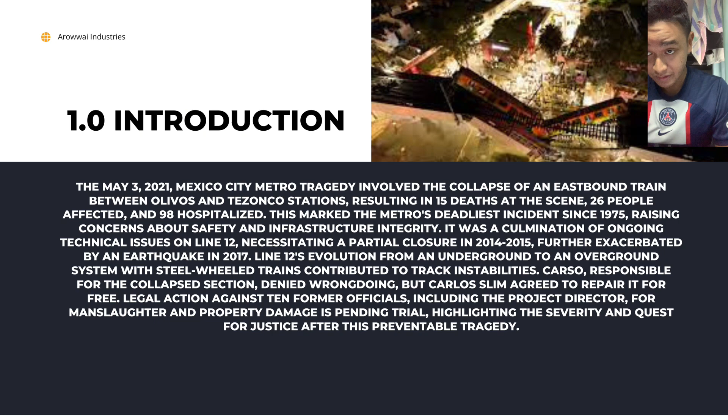Next part is 1.2 Cause of the accident. Empresas ICA, along with Alstom Mexicana and Grupo Carso, undertook the Mexico City Metro project, yet critical flaws emerged despite their collaboration. Mayor Claudia Sheinbaum enlisted Det Norske Veritas, DNV, a Norwegian risk management firm, to investigate the collapse.

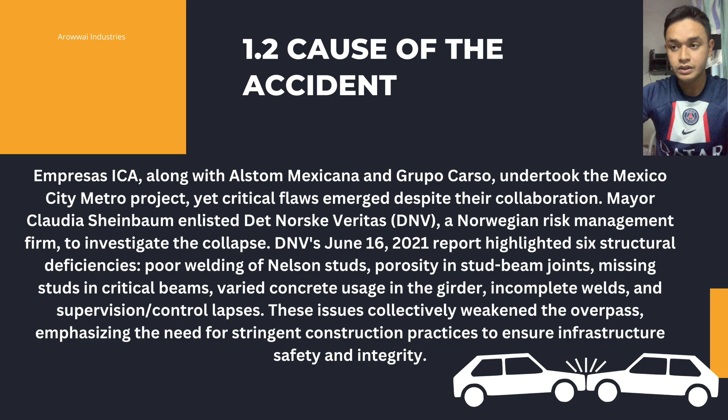DNV's June 16, 2021 report highlighted six structural deficiencies: poor welding of Nelson studs, porosity in stud beam joints, missing studs in critical beams, varied concrete used in the girder, incomplete welds, and supervision control lapses. These issues collectively weakened the overpass, emphasizing the need for stringent construction practices to ensure infrastructure safety and integrity.

Next part is 1.3 Ethical issue. The collapse of the Mexico City Metro overpass has raised ethical concerns that demand attention. This encompasses the responsibility of infrastructure projects, especially public transportation, to prioritize safety inherent to construction standards and the credibility of involved entities. The DNV report underscores ethical aspects tied to quality assurance and oversight through construction. Corporate responsibility, notably for companies like Carso, requires transparent communication and accountability for errors.

The steps to rectify mistakes and government oversight also hold significance, necessitating an effective framework and ethical conduct to prevent such accidents. Transparent post-accident communication, fair legal process, and addressing these ethical considerations are vital for fostering a transportation system grounded in safety, transparency, and social responsibility.

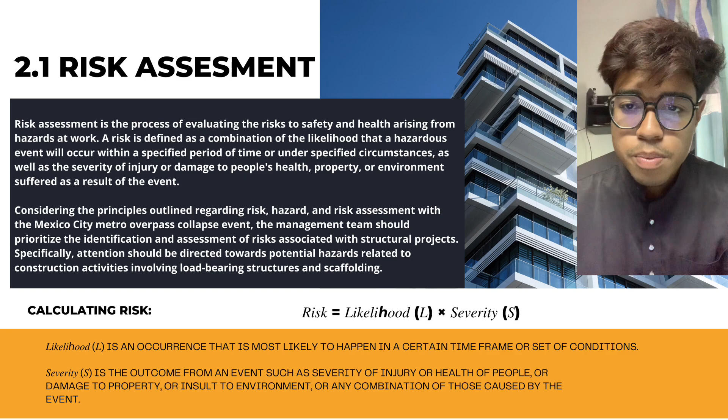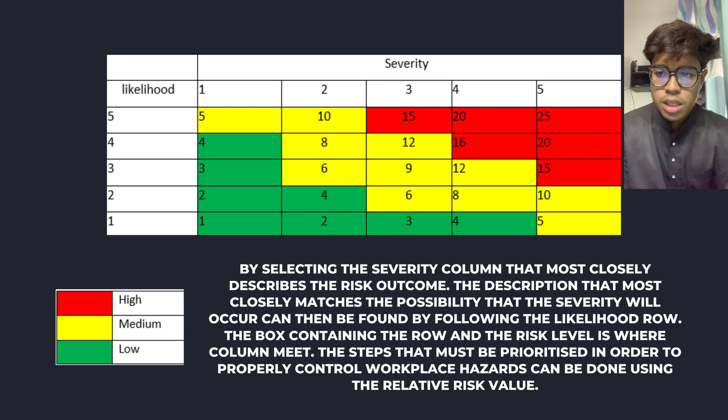So this is the level of hazard based on the table above. Hazards marked as high risk need urgent attention to protect life, safety, and the environment. Clearly identify and assign responsibility to individuals for taking immediate action and follow-up. Consider using a detailed risk assessment method like quantitative risk assessment to figure out effective ways to control and minimize this risk. As you guys can see, we have indexes 1 to 4, 5 to 12, and 15 to 25: 1 to 4 is low, 5 to 12 is medium, and 15 to 25 is high.

For the high, you can read in this column: a high risk requires immediate action to control the hazard as detailed in the hierarchy of control. Action taken must be documented on the risk assessment form, including the date for completion. For the medium, a medium risk requires a planned approach to controlling the hazard and applies temporary measures if required. Action taken must be documented on the risk assessment form, including the date for completion. And for the low, a risk identified as low may be considered acceptable and further reduction may not be necessary. However, if the risk can be resolved quickly and efficiently, control measures should be implemented and recorded.

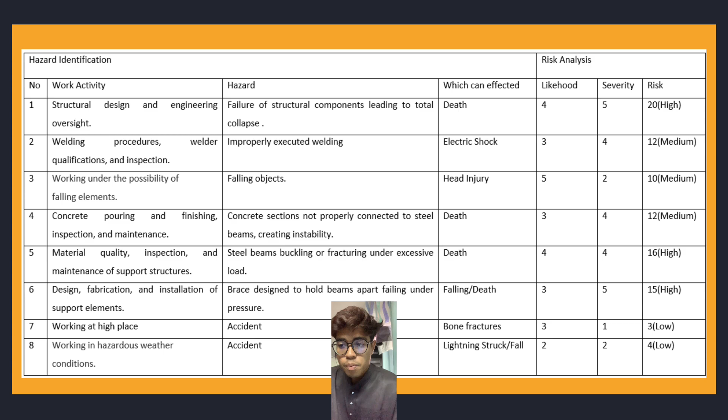For the second one, we have welding procedure, welder qualification and inspection. The hazard is improperly executed welding, which can cause electric shock. The risk of this hazard is medium, which is 12. And number 8 is working in hazardous weather conditions. The hazard is accident, which can cause lightning strike or fall. But the risk is low because it's in the range of low hazard.

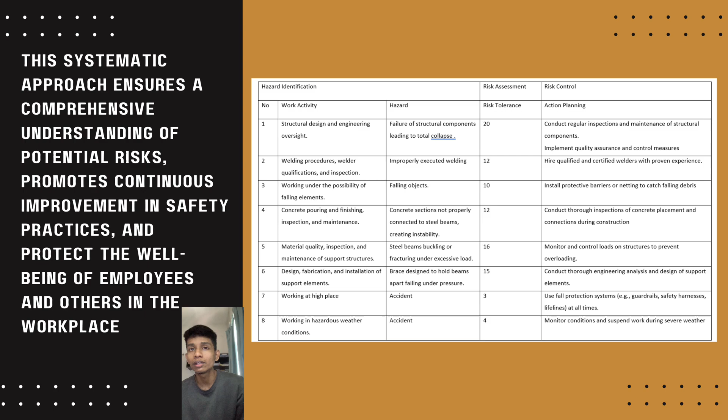As we can see, here is the table of hazard identification. There are 8 hazards, and we have the risk tolerance and action planning.

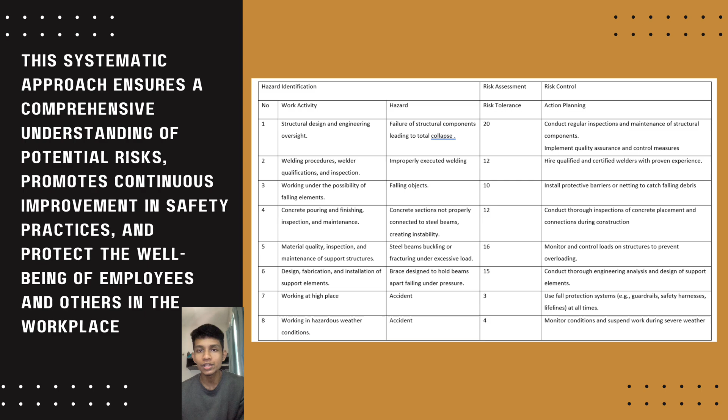Now I will explain about this table. The high risk activities, as we can see, have a tolerance of 20, the first one being cause of failure of structural components leading to total collapse. In order to control the risk, implement rigorous quality assurance and control measures during construction. Conduct regular inspections and maintenance of structural components, and develop contingency plans for evacuation and emergency response in case of structural failure.

Then we can see medium risk activities, which have a risk tolerance of 12, for welding procedures, welder qualifications, and inspection. To address this, consider hiring qualified and certified welders with proven experience and conduct regular inspection of welds during and after construction.

And the last one is low risk activities, such as working at height, with the lowest risk tolerance of 3, for accident hazards, indicating effective control measures. Continued vigilance is necessary. Enhance awareness and mitigate potential risk by using fall protection systems, for example, guardrails, safety harnesses, and lifelines.

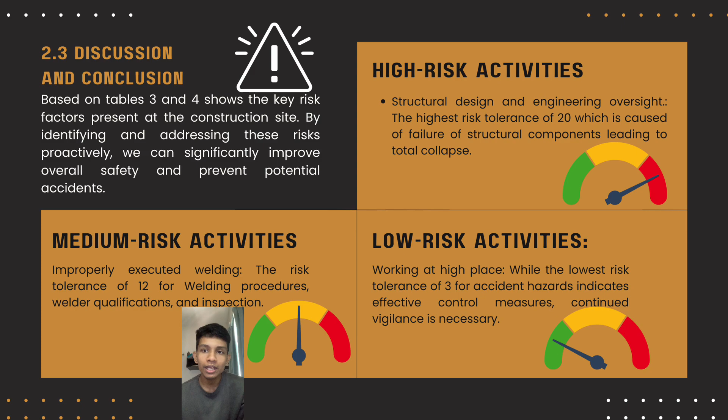The broader commitment to minimizing environmental impact has global resonance. For Malaysia, the incident underscores the importance of strengthened oversight, adherence to construction standards, and proactive risk management. It calls for embedding transparency, responsibility, and continuous improvement in engineering practice, fostering a culture of ethical conduct, especially considering Malaysia's diverse ecosystem. The incident served as a catalyst for a cultural shift toward an unwavering dedication to safety, environmental sustainability, and public welfare, offering crucial lessons for a resilient and ethically guided future in infrastructure development globally, including Malaysia.